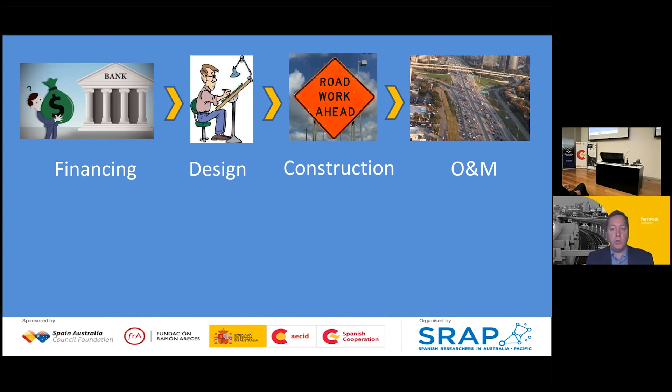And once you have the design done, you can start with the construction. And when the construction finishes, that is not the end, because you have to operate and maintain the asset. We design highways for a service life of more than 100 years, so you need to take care of that highway during that period of time.

And which are the key parties involved in all these activities? The public sector and the private sector. Different players, different agents, but those are the big two parties.

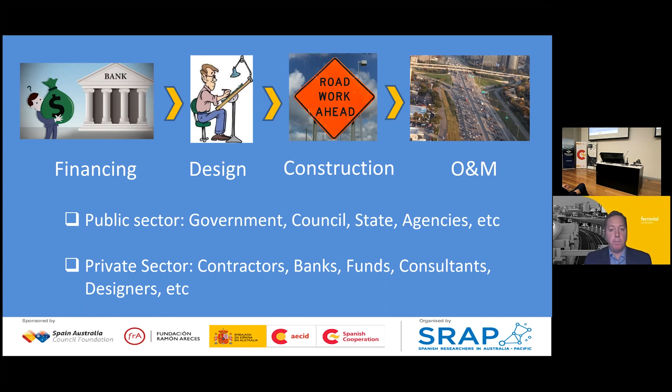Right now, imagine that we have the funding and we want to make that highway. Which are the typical procurement options or contracts in transport infrastructure? Those three - construction only, design and construction, and public-private partnership - are very typical all around the world. There are many others, as complex as possible because we always have lawyers around, but I'm going to talk about these three.

What is a construction-only project? In this type of project, the funding is done by the public sector, same as the design. The public sector manages the design always through a private company like a consultant or a designer. Same with construction - they engage a construction company to do the construction, and the same with operation and maintenance, usually done by the public sector, or sometimes even subcontracted.

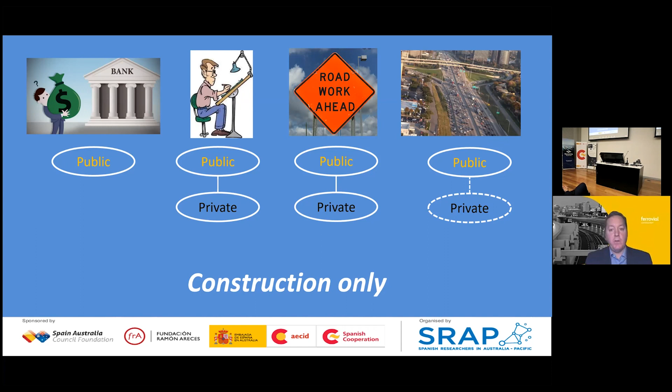But as you can see here, all those activities are isolated from each other. And although you have the public sector transversally across all those activities, there are no synergies because sometimes there are even years between one activity and the other. This is very typical in small, not very complex projects.

Then we have the design and construction type of contract, in which, again, the public sector is doing the funding, but we have a small difference that makes a big difference - now we have a unique contract for design and construction, so the design and construction are integrated, between a contract between the public sector and, for example, a construction company and some designers. Then, again, the maintenance and operation is done by the public sector. This is very typical in medium to large projects, like above 300 millions to billions sometimes, with some level of complexity.

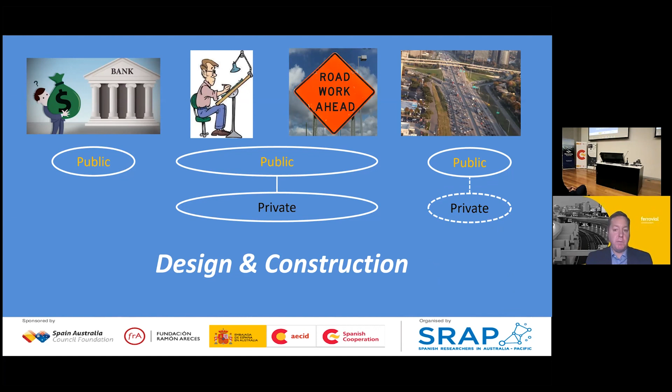And then we have this public-private partnership.

Here, everything changed since the very beginning, because we have the public and the private working together in the funding. This is basically because the public doesn't have enough money to make that highway possible, and they ask for money from the private. This is what we call the SPV, the Special Purpose Vehicle, which is an entity formed by a group of banks or infrastructure funds or people with money, at the end of the day.

Through this Special Purpose Vehicle, they subcontract again the design and the construction integrated into one unique contract, and the same with the operation and the maintenance. So as you can see here in the picture, it changed a lot. Everything is wrapped under one head contract, and all activities happen at the same time, not from the chronology point of view, but from the decision making and within the same team. This is very typical in large and complex projects.

Obviously, the guys that are investing money have to get that money back, and that usually is done by the operation of the highway. They get benefits from operating the highway through the concession period, which usually is between 20 and 50 years, depending on the contract.

This is the project that we did in Dallas, between 2010 and 2015. That is the LBJ. Obviously, everyone knows where Texas is, in the south of the United States. Dallas, north of Texas, and this is the layout of the corridor of the project, which involves the I-35, north-south, and the I-635, which is called the LBJ, the Lyndon B. Johnson, east-west.

I think this is the picture that we all have in our minds when thinking about 500,000 cars on a daily basis on a highway.

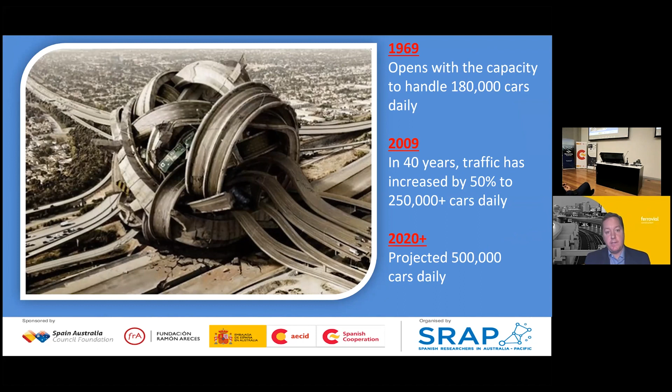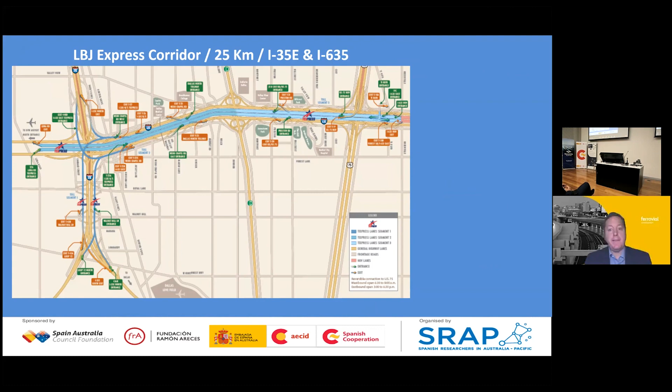Okay, so now let me give you two examples of the advantages of this type of contract. I said before that not always the tollways are the enemy. In this project, for example, we improved the freeways. We didn't remove any free lane—just the opposite, we improved the capacity of the free lanes. We improved the capacity of the frontage roads, and we just added some toll lanes, 3+3 lanes, in case someone wants to use it.

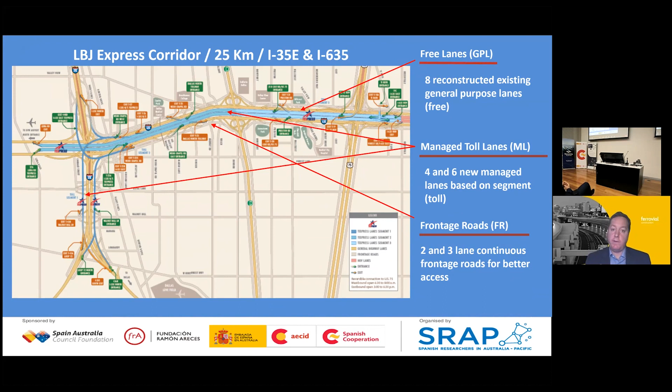So at the end of the construction, if you are a driver on that highway, you can choose between the freeway, which is even better than before, or if for whatever reason you want to get faster to a meeting, or faster to pick up your kids at school, you can use the tollways.

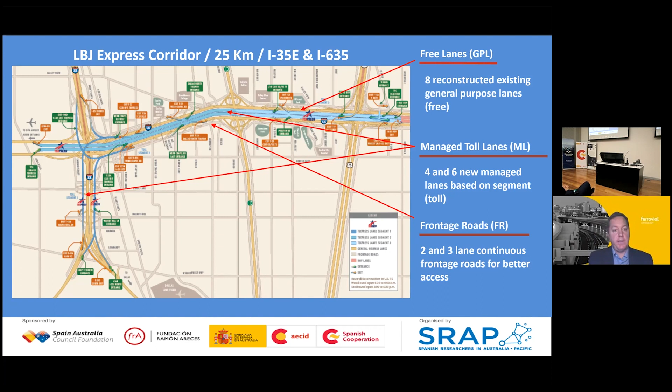Which are under what we call these tollways, the managed lanes? Because you can guarantee the level of service always. In other words, we guarantee that if you take the tollway, you are never going to have traffic on it. And we do that by playing with the fares, okay?

Another example of what I was talking about before is value engineering, the value for money solutions. This project was dead since the beginning if procured like a construction-only project or a D&C, and it was almost dead also under a PPP, because the awarded design, our solution, was the only financially feasible proposal.

As you can see in the picture, the Texas Department of Transportation wanted to implement two toll lanes, and they were thinking of two tunnels below the freeways. Our competitor was able to remove one of those tunnels by implementing one of the toll lanes on the surface, but we came up with this solution you can see here, with some depressed managed lanes.

Let me explain, because tunnels are probably the most expensive piece of infrastructure in a highway, not only from the construction point of view, which can be very complicated, but also because from the operation and maintenance point of view they are very, very expensive.

So by removing those tunnels, we were able to make that project feasible. We won the project for one billion dollars less than our competitor, and like I told you, it was the only feasible proposal. So again, by looking at the global picture, the whole of life, and being able to talk with the operator, to collaborate with the construction guys and the maintenance guys, we were able to make this solution possible.

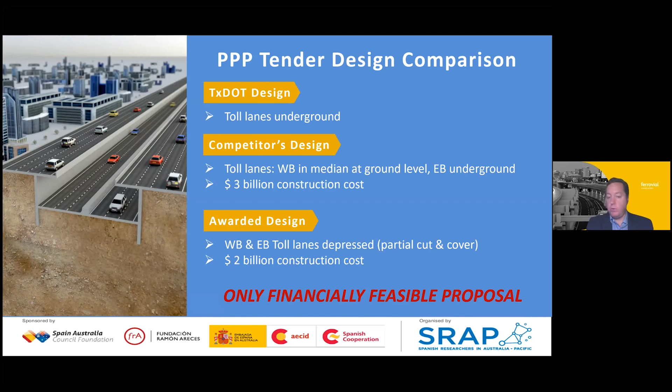Okay, so I'm going to show you, hopefully it works, a short video of the highway nowadays. I don't know if you can hear the music or not. But this is how it looks after opening. I think the video was made before 2020 or so. I would say it was an incredible job.

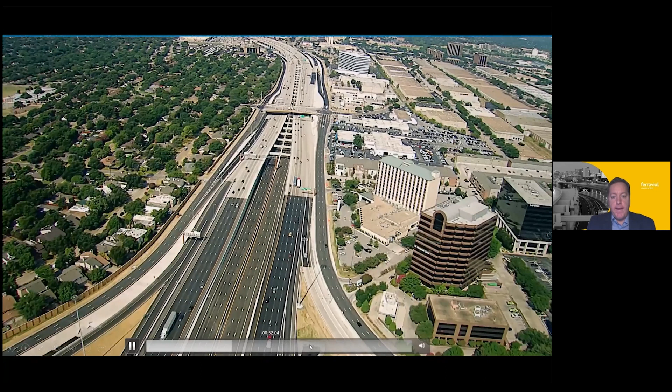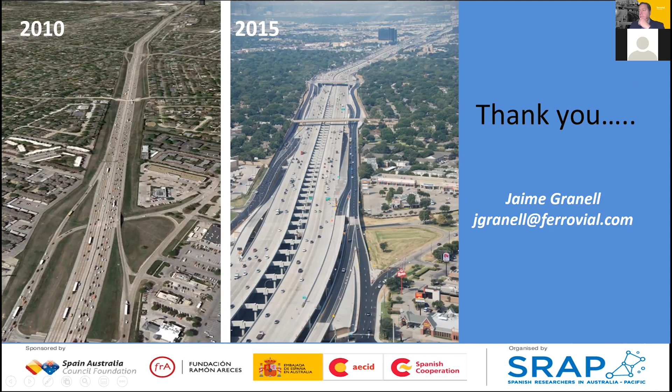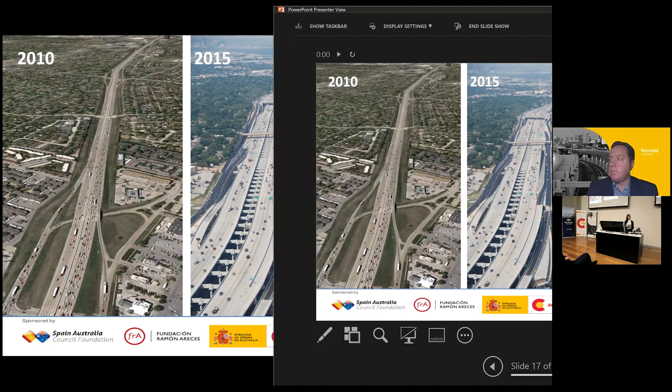Thank you very much, Jaime, for your presentation. I work in health planning, and we are very interested in gaining further knowledge on mega projects, and how we can transfer the information you are generating in mega projects to the area of healthcare.

One key issue that has come up in this discussion is decommissioning. You develop all these strategies, and it could happen that there is a decommissioning of a mega project. How do you face this type of situation in the mega project strategy?

But do you mean from the health perspective? No, from the general perspective. One of the things in health is how you transfer the care provision of a whole catchment area to one insurance company, for instance, or one provider, and how, once you have done that, you can on the long term decommission this transfer.

Yeah, well, the insurance world, you know, behind insurance is a very complicated topic in infrastructure, especially nowadays with these large, big projects. I'm not specifically an expert on that field, but I can tell you that under a PPP project you can share the risk in a more appropriate way between the public sector and the private sector, at all levels of that structure I was presenting before. In other words, when you have a design-and-construction project in which usually all the risk is transferred from the client, from the government, to the contractor, that's when you can struggle with that kind of liability or insurance issue. By having this type of PPP procurement, or 3Ps, that's when you can somehow share the risk. I don't know if I'm answering your question specifically or not.